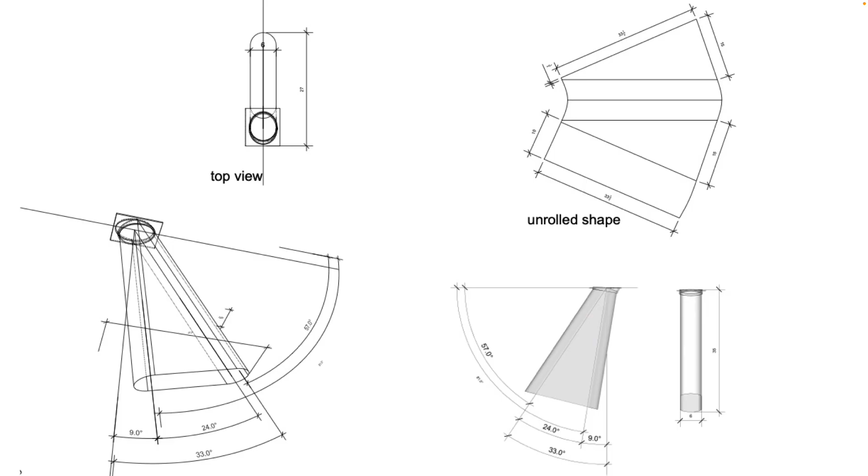This was really an aluminum kind of wrapped piece that I did use some Grasshopper for. There's a section through the roof assembly and that piece letting sunlight through at different times of the day. The more extreme angle is the equinox, and the more vertical angle is the summer solstice. There's Doug McCord. We're installing it in the roof assembly.

There's also this notion that creativity implies balance, so balancing technique with poetic understanding. Again, that narrative sensibility that we develop, almost the mind of a writer, right? And when we're drawing a building, we're also writing in space, you could say, right? So use all the tools at your disposal to experiment is something I like to say.

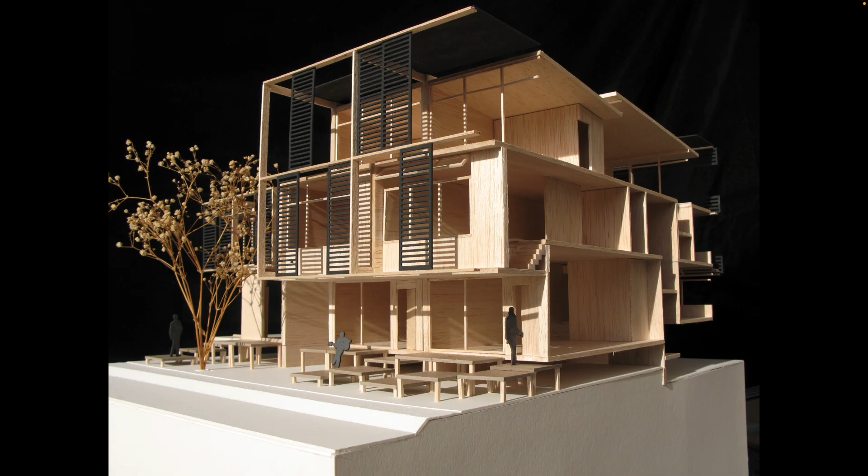This is a housing project I had the opportunity to design for New Orleans in my, I think, 4th year of undergraduate, after the Katrina hurricane in '05. Some work — models, representation, charcoal drawings, different things that interested me when I was in my undergraduate. Both to do with this kind of serialization of form, looking at things in a serial fashion in order to understand the kind of dynamism of it, but also just moments of shadow, moments of pause.

Models can be taken on the road. So this was actually my first job in architecture, for David Baker Architects in San Francisco.

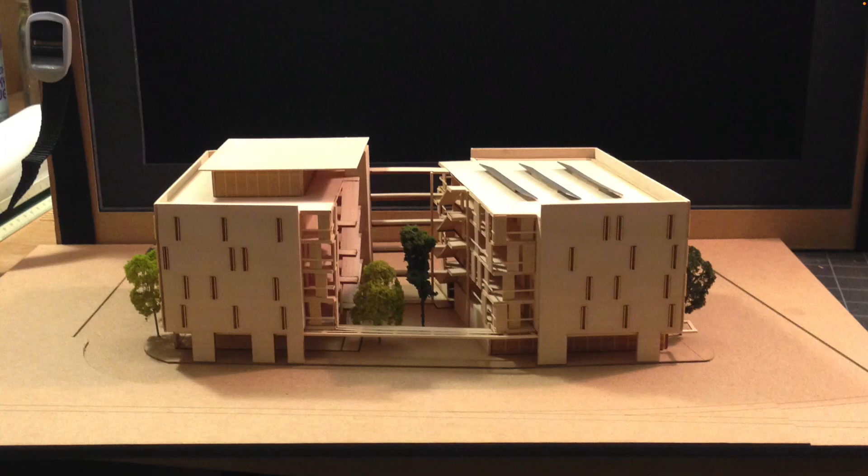After I graduated from UC Berkeley, I got a job as a model maker for an architect. They wanted to take this model to the client, and the project was in South Carolina. They had to carry this model on a plane, so it inverted and folded out of this little case. So again, a model is more than one thing.

Sometimes models are at an urban scale, assisting an architect in studying urban form in a certain location. Sometimes a model is just an exploration for its own sake. I call these bug models. They're like little studies.

Students have made tiny models during the pandemic so that they could carry them easily. The importance of forging friendships, I think, is critical.

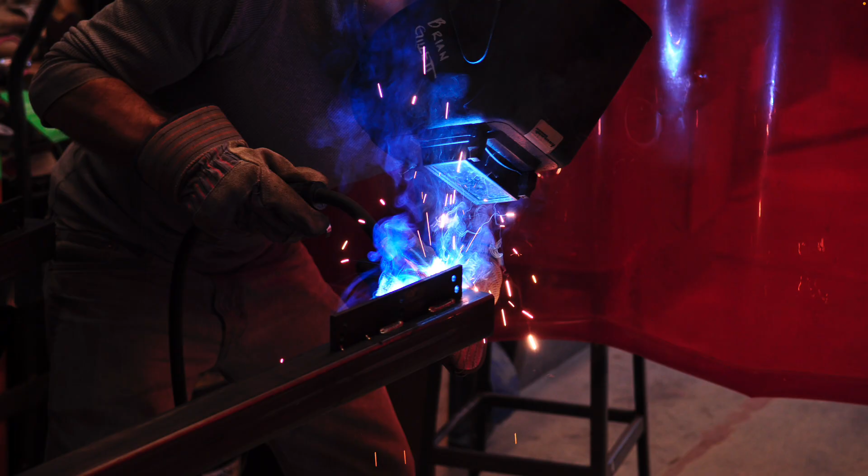So this is the plant lab. This was a project inspired by a group of students that built another project I can show, and we formed our own class. This notion in academia is that we have to go through the system, one class after another. As students, you have this kind of power, if you can find funding sometimes, to invent your own coursework at times. So we took this on ourselves.

This notion of a modular food system, we were interested in its representational capacity, which was a little surreal because it was at the San Francisco Flower and Garden Show in San Mateo, with a lot of homeowners looking at bird baths and landscape architects and things. This was like an alien object that landed in the show, so it was a very unique, interesting experience.

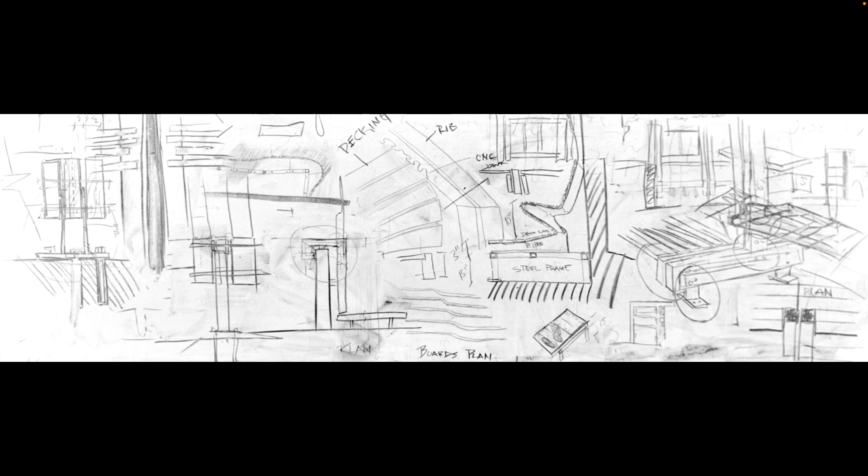Some more shots, I think these were all taken on film. This is the first project that preceded that, with the same team, a bench that we created, and the importance of drawing, talking about that narrative sensibility that we develop.

Developing that same sensibility by hand in drawing. This is an inverted image of a chalkboard we used over the course of an afternoon to figure out how we were going to approach fabricating a bench with a very small budget. This is the evolution of the bench form, which started as a kind of reclined form, and we decided to break it up into multiple pieces and explore this folding operation.

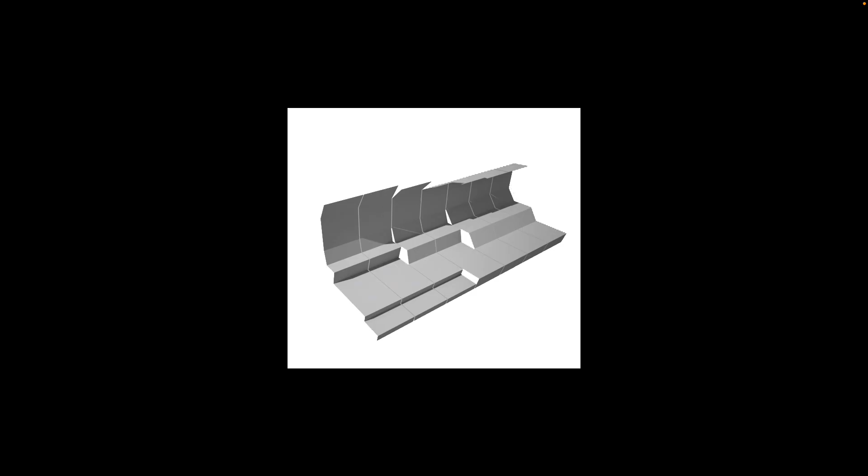To me, this type of design bridges an interest between material sensibility, fabrication, and architecture, in a way that it's an occupiable, large piece of furniture.

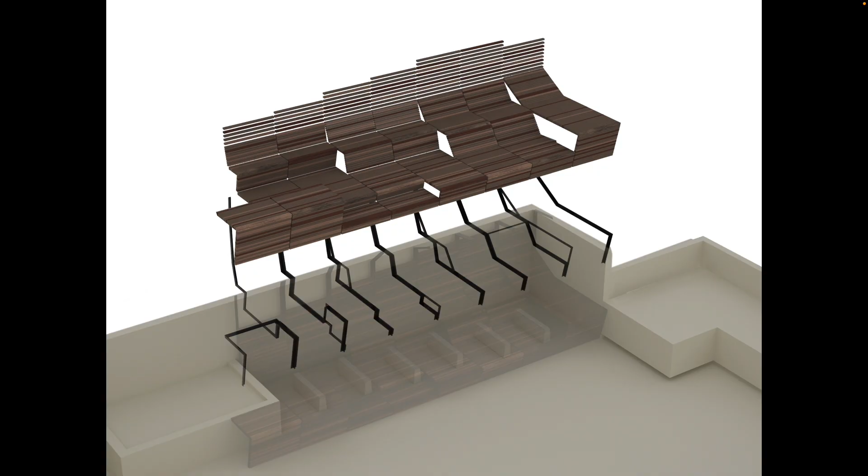There's the assembly: two back-to-back steel angles form the central structure, concrete foundation stem walls, and upcycled redwood that came from a local redwood supplier. These trees had been attacked by beetles and had to be cut down, so we upcycled the wood.

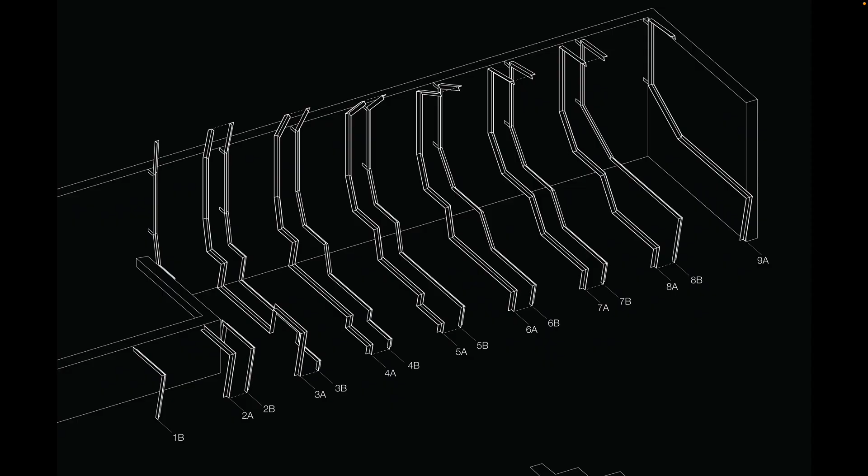Again, getting into the sensibility for shop drawings. If anybody knows about shop drawings, once you're building a building, specific elements like stairs or windows require another level of detail. They'll create what's called shop drawings, which generates the structure, which then generates the project.

It's a social space, kind of used for happy hours. It's still there on the UC Berkeley campus.

Another tenet is to work hard. This was the hardest work I'd ever done in my career, for a design-build architect here in the Valley. Once you're on a job site, if you ever have the opportunity to visit one, always take it. You'll learn so much, seeing details coming together, material systems, the reality of building. You'll learn a ton just from visiting a job site.

I was working as an assistant superintendent, figuring out how these curtain wall columns, the window wall itself, were going to meet each truss. The truss package, every single truss in the building was unique—there were 268 of them. I worked with the truss manufacturer to get their 3D model and bring it into the Revit model to coordinate all these details. Huge learning experience.

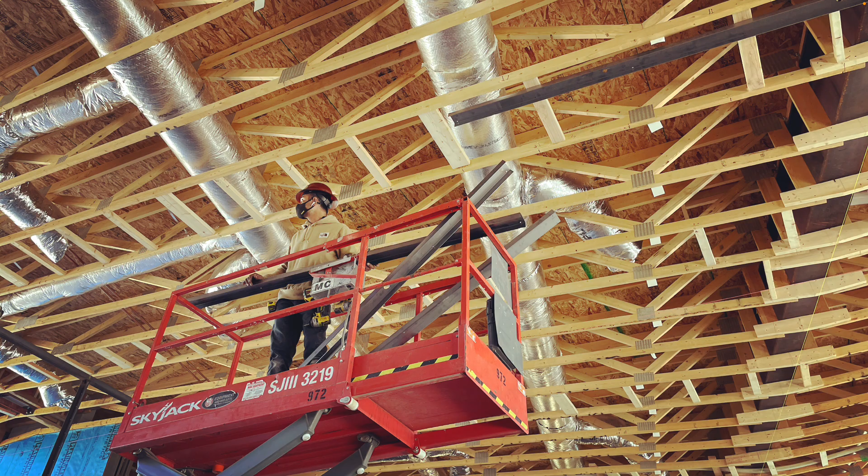We also created these channelized systems in the ceiling. This all gets covered in lath wood eventually, but the trusses are exposed, and you see this kind of channel. Within each channel is sprinkler openings, light openings, and air delivery, so all those details are carried by that channel.

Some of the work is not glamorous. I'm driving the water truck, having to keep the dirt wet, and thinking to myself, I have a master's degree, why am I watering dirt? But it's kind of a degree of humility. It's actually really interesting learning about how a construction site works as well.

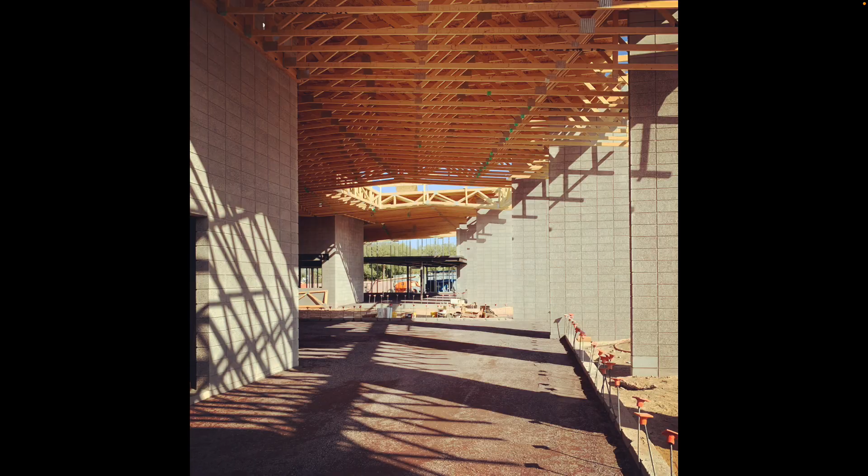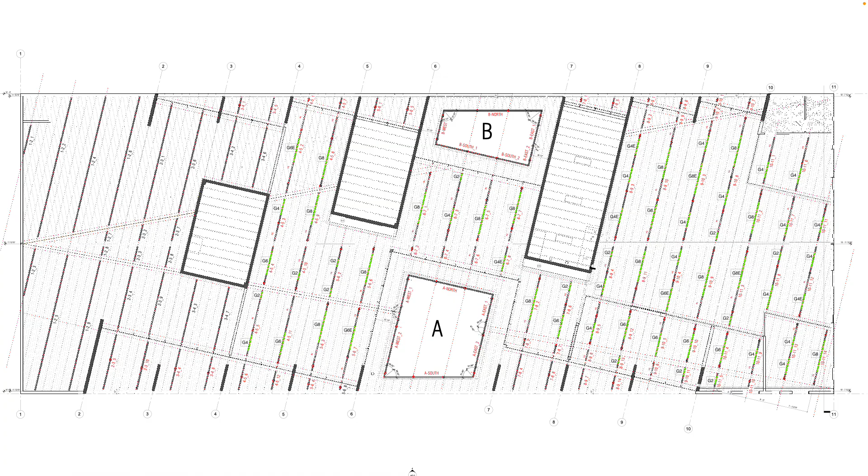Some shots of the interior. This is the reflected ceiling plan of that ceiling, and this is the shop drawing I used to locate everything, every feature in the ceiling. Developing this drawing took me about 3 weeks, during construction, where there's an urgency, we had to label every piece, every element, and then it had to be digitally fabricated.

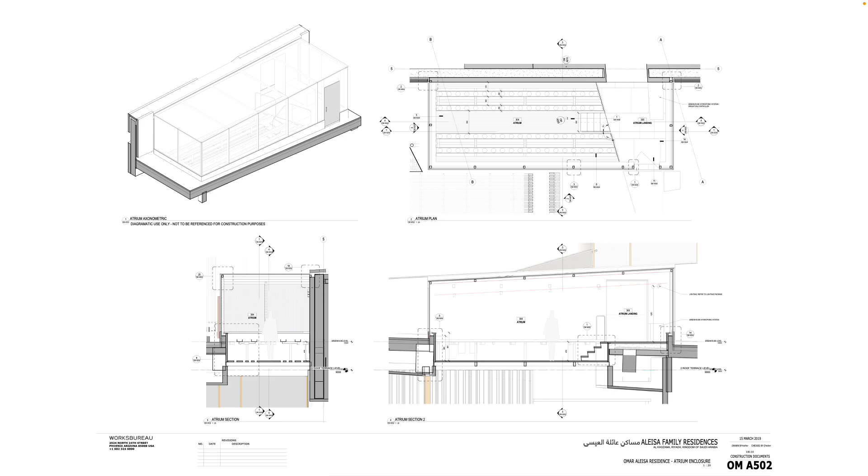Learning about architecture, about how details come together. This is for an atrium on top of a residence. Once you really start getting into detailing, into drawing using BIM or another program, you learn about what's called level of detail, how things are represented in reality for the contractor and subcontractors to understand how it comes together. This was the first project I ever drew in Revit that I was solely responsible for, being the BIM leader on the project.

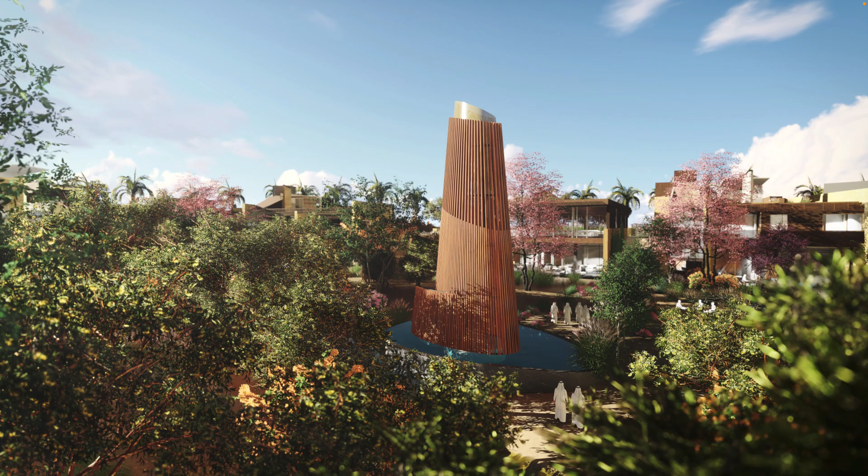This is the first project I ever drew in Grasshopper, which is a shade pavilion. Every element of it, from the structure to the wood slats to the skirt of metal at the top, was all done with parametric software.

Some speculative work. This was a project for UC Berkeley, my alma mater, where I went to grad school. This is a student life space study for the campus. They are expanding student life space, buildings that aren't academic, where students use things like the Memorial Union or any number of spaces that students use every day, that you maybe don't notice someone had to design. So how do you fit something into a campus?

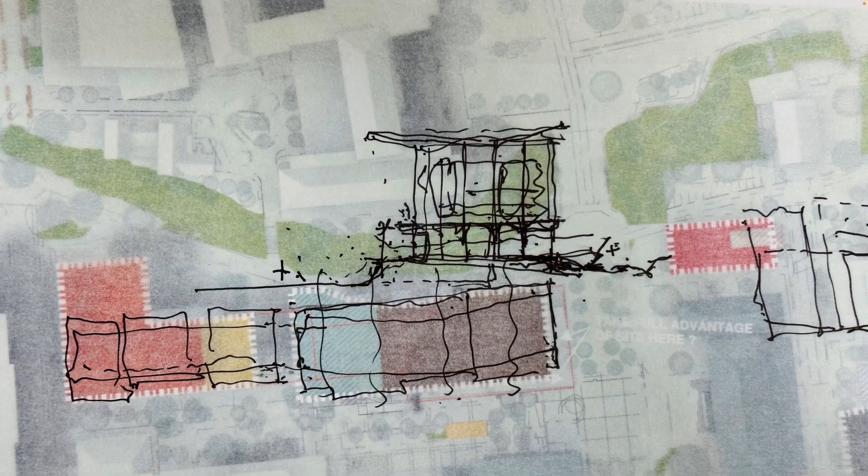Sketching early, figuring things out, from diagram to sketch. Lots of sketching, diagramming over 3D models. Mixing media between a physical process and a digital process can be really fruitful. This is the campus plan.

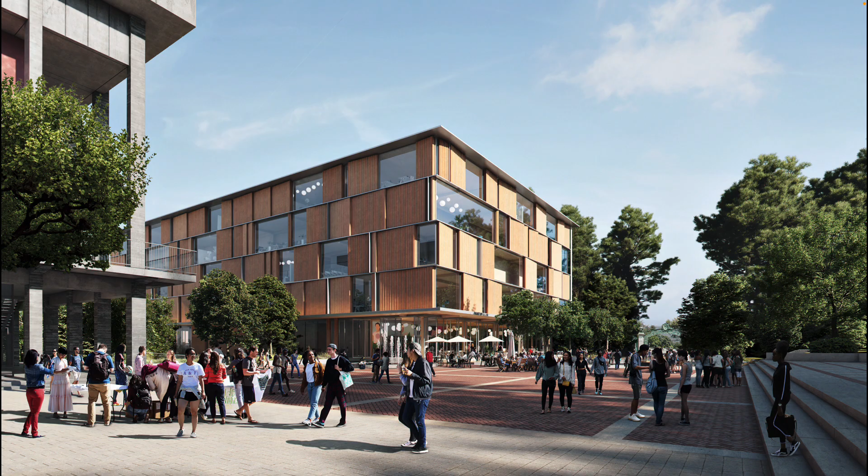The final renderings of the project, which was the student center. This is Sproul Plaza, where lots of student protests took place, like back in the 60s. It's a very important social space. And this is the entrance to the campus.

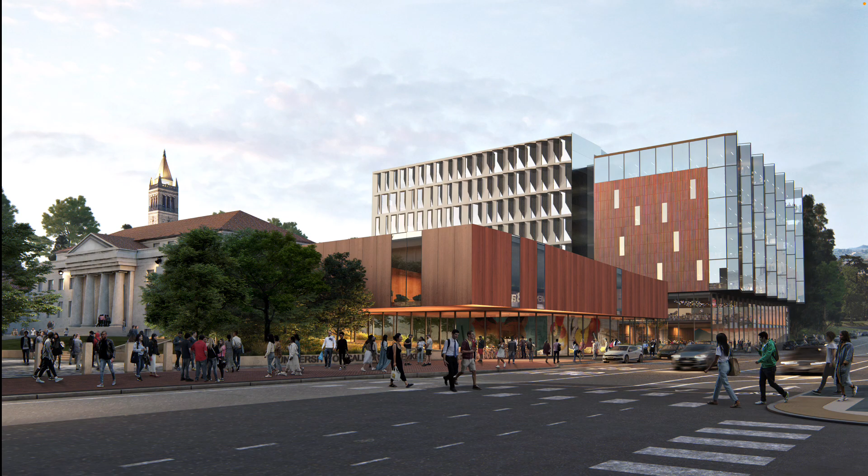I had another small opportunity to use some Grasshopper on shading elements and things like that. And working now I'm interested in this idea of optimization, which I understand your class is also looking at, kind of energy modeling and that kind of thing.

So Picasso said, to know what to draw, one must begin drawing.

So let's jump into a little bit of Grasshopper. Grasshopper is an interface that links with Rhino. Everyone used Rhino before? Probably the majority of you. You can, for lack of a better term, think of every command that happens in Rhino, for example drawing a cube or a line or a point, as having an interface in here that can reference that geometry.

So I'm going to make what's called a brep, which is just a 3D volume of space in Grasshopper. I would just double click into the Grasshopper space, say, hey, I want to reference an object, right click, set one brep. Now Grasshopper knows that that object is that volume. Information flows in Grasshopper from left to right, unless you have a very disorganized script, you want information to flow left to right. The idea being that you can do any number of operations you can imagine on this geometry.

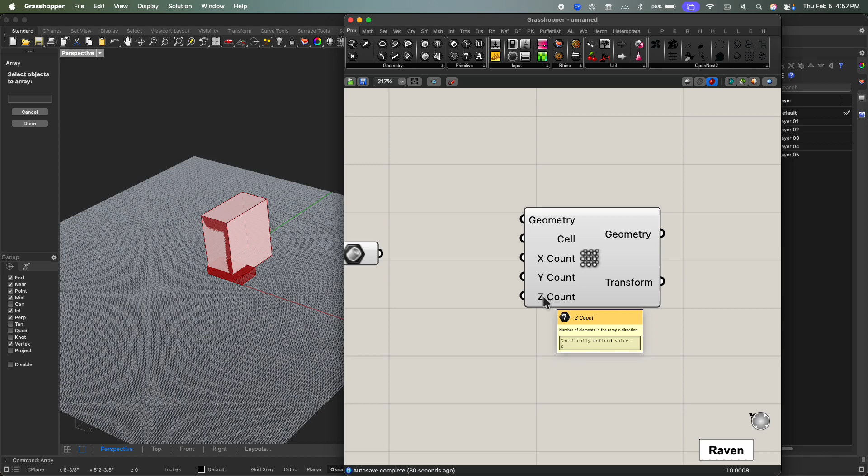So let's just say we want to array the geometry in a volumetric fashion. It's asking me for a number of inputs, just like a command in Rhino. If I wanted to say array in Rhino, what's it going to ask me? Select the objects to array, tell me what object, right? It's doing all those same things, but in a graphical node-based interface. It's asking for the geometry, it's asking for the cell, or the spacing by which that geometry will be multiplied, asking for X, Y, and Z. How many of those objects will there be?

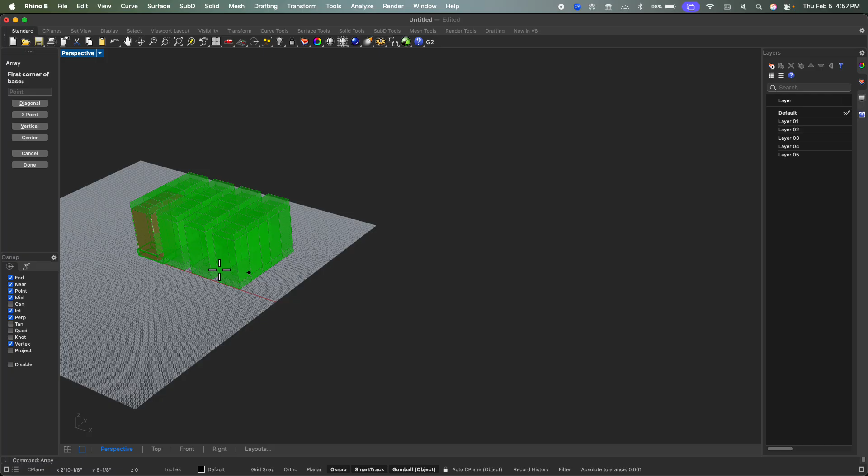So I can give it these inputs. I can tell it, well, this is the geometry, and I'm going to connect that node like that. It's going to immediately have some default values in here, so you'll start to see something happening that isn't maybe what we intended. But we can say, all right, that cell is going to be set to one box. I'm just going to define a loose form like this, and then I'll double click and enter a couple values. If I type in the number 13, it's going to create a number slider. I'm going to copy that a couple times and provide that information to this node. So X, Y, and Z, that becomes the number of elements in the array.

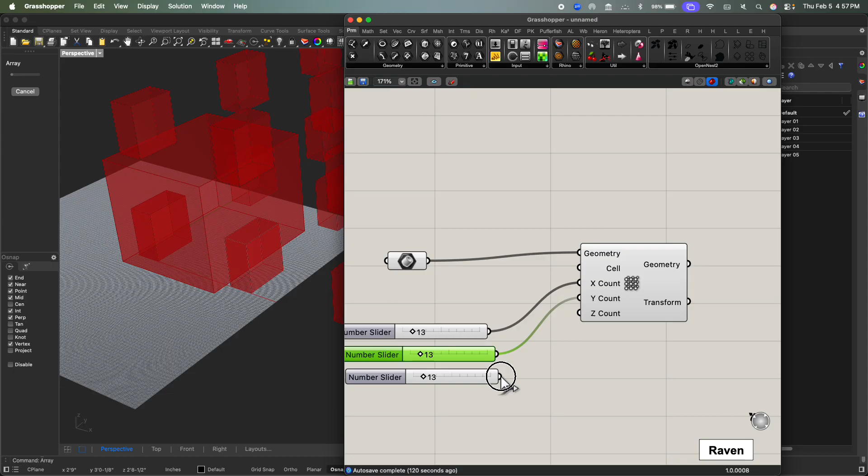So there's a whole array of objects, right? Now this is how Grasshopper thinks, using digital information, inputs and outputs, essentially. And that's all you're really seeing in a Grasshopper script. When you open a Grasshopper script, or when you get lost in one, it can look very complicated. You can have memory problems about what you were doing, what mode you were in when trying to solve this, what your state of mind was. But getting into this space allows you to automate some things that might be repetitive otherwise, and gives you an advantage in that way.

Now, to go a little bit further than this, let's just say we want to reduce the number of these. The cell, yes, is essentially—if I hover over any of these, it'll tell me the cell is a 3D box array. So the cell is another volume of space that's defined as two opposing 3D points.

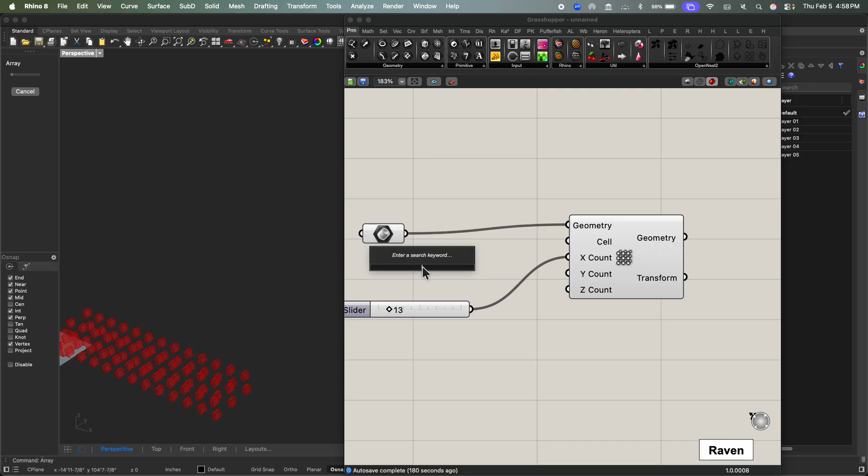So you didn't need to indicate that to make that array? I could use geometry here, I could type in geometry, I could set a physical object in Rhino as that input. But what I did instead—I'm sorry if I didn't explain that—I right-clicked on that input and said I'm just going to set one spacing, or set one box. So if I change that now to a much larger area, for example, those are going to space way out because that's just the input for spacing.

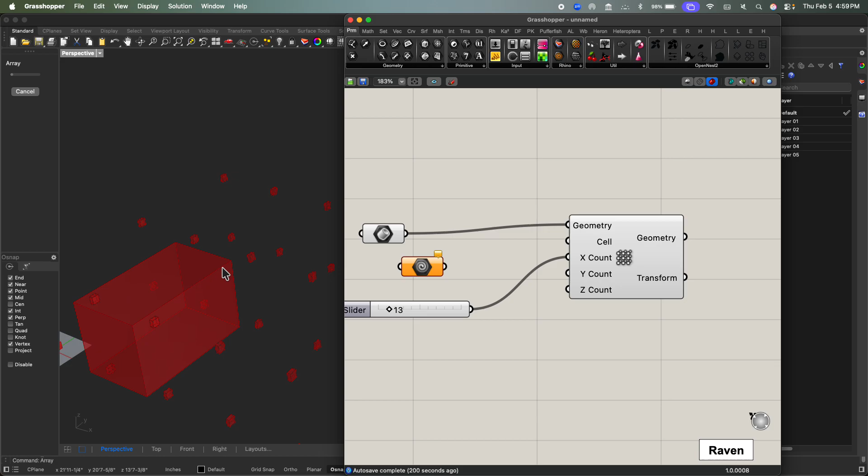Got it. So one thing that's a new tool that's come along—and I know people have opinions about AI and energy use concerns, and those are all very real things—but AI is also useful for helping us problem solve. So I'm going to show you a tool called Raven. There's a student version of Raven that's, I think, $5 or $10 a month. It's $50 for the pro version otherwise, so it's a pretty good deal if you're a student. And once you install Raven, it appears as a button down here on the lower right.

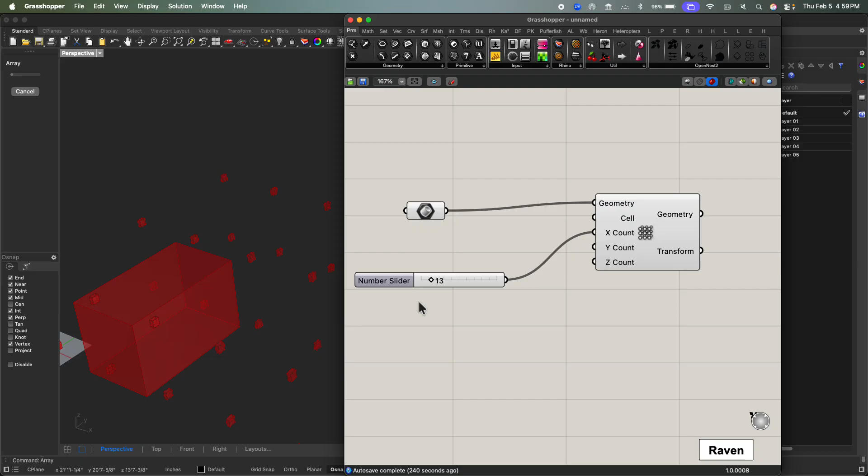Let's imagine—I'm going to actually reset this cell to a smaller spacing so we can see what we're doing. And let's imagine, for some odd reason, we want to rotate these cubes in some fashion. Now, I don't have enough Grasshopper knowledge to do that, I don't know how to do that. I'm going to use Raven to help me do it. So Raven's a wonderful way to learn some Grasshopper. Raven opens as this dialog window that actually stays on top of your desktop no matter what you're doing. So if I open Rhino or Grasshopper, this stays on top—they're still working on this tool.

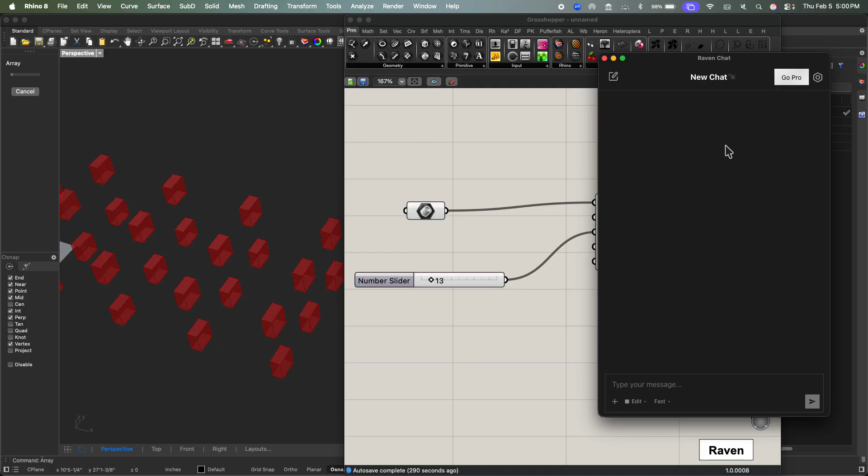It's in its first version. But within Raven, I can use language, back to the narrative sensibility, right? I can use actual language to tell Grasshopper to write me something, which is pretty impressive. It doesn't mean you don't learn Grasshopper—it's not a workaround to some deliverable. It's really part of a window into a process by which you can learn more of this kind of workflow. So let's say I want to randomly rotate these cubes. I can prompt Raven just very basically using the brep input: rotate the cubes about their center randomly.

Now, when I write a sentence like this, it's essentially a mini Grasshopper script, if you really think about it. I'm saying do this over here and then that.

So now I'm going to hit enter. I'm going to put it in smart mode—there's fast mode and smart mode. There's also ask mode, where you can ask it questions about a script. It won't edit it, it'll just tell you what's happening in the script, which is pretty interesting. So I'm going to hit enter and just see what it does.

We'll zoom out a little bit here. It's going to think for about a minute—usually it's under a minute, depending on which settings you have. It starts thinking about component search, looking for a list of components related to my prompt, and starts to put those in the space of Grasshopper, connecting them based on its knowledge of how they should connect. It's a recursive process, which is related to design. We don't design something in one pass—we design things iteratively. This is an iterative process.

So we're going to see what it thinks. Still thinking. Are there any questions while this thinks? What's the difference between fast and smart mode?

Just speed, really. I think smart mode will look more specifically at your language structure in some ways, while fast is more about a quick result. If you're using fast mode to do something very simple, like arraying a grid, or even what we're doing right now, which is relatively straightforward, you could probably use fast mode. And you clicked smart, though. I did click smart, because I'd rather it get it right. And the idea of speed in the design process is its own topic.

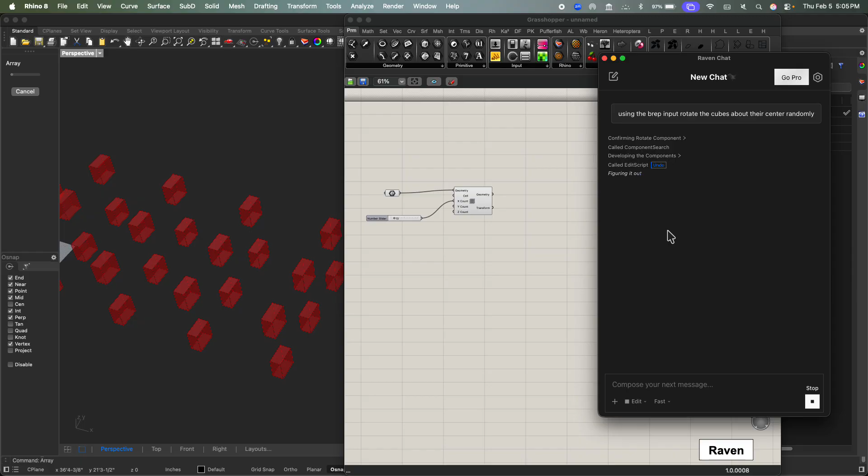So when you're optimizing something, you're really thinking about: what's the weather data, how do I bring that in, what are the constraints, what do I want to change in terms of a depth or a width or a certain number of parameters. If you have too many parameters, you're either going to break that solver and it's not going to work, or you're going to return a lot of errors. So the more you can edit down that optimization process to know exactly what you're solving for, the better off you are.

I have a quick question. Yeah. Do you guys know what optimize means? Do you have a guess? Yeah, what is optimization? Anybody? Efficiency, like taking less steps to do something. Yeah, that's one way to think about it. What might be another working definition?

So efficiency is involved for sure. I would say it also implies an iterative process—recursive processes, or trying things over and over again to find the best result. But fundamentally you're right, it is about efficiency. It's about finding what's going to give you the result that maybe returns a lower energy use, for example, or returns a lighter structure. But that reiterative part is important too, because optimizing is not one thing—it's a process to optimize. So it's not just efficiency, it's the optimization process, which is reiterative, as you mentioned.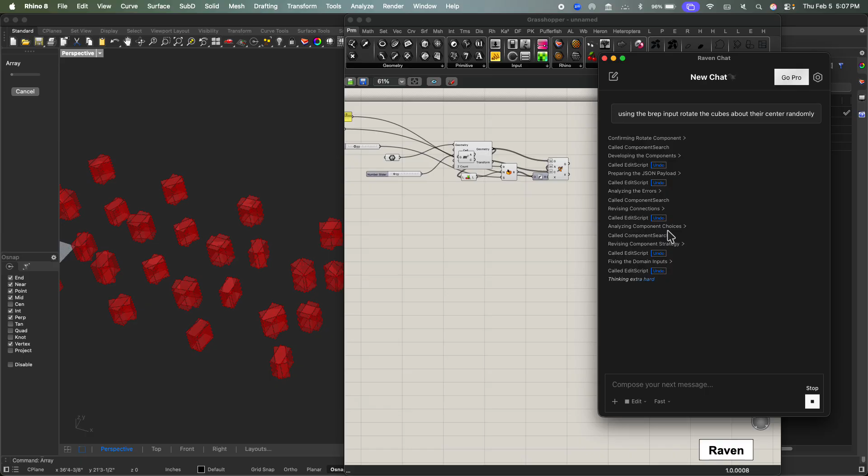Yes, and there are terms within Grasshopper that are specific to Grasshopper in some ways, but there are also broad terms that just mean what they mean, right? A point in space is always going to be a point in space no matter what program you're working in or what reality we're talking about. A point is a point. So the mathematical constructs of those things aren't changing, but the way we can describe them can change.

So now it's kind of finished. I've added a random rotation to your cubes. I used area to find the center of each cube, generated random angles between 0 and 360 degrees using random and list length, and Rotate 3D. You can adjust the seed slider to change the random pattern.

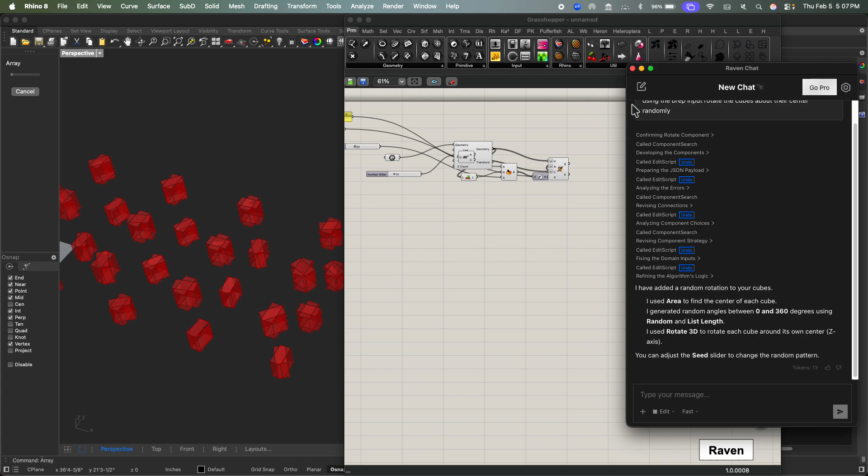So what Raven has written here might be a little messy, but it is cohesive, and none of these components have turned red or orange, which would indicate that they're not working—so that's a good sign. And you can see over here that we have some rotated cubes that look like they're overlapping.

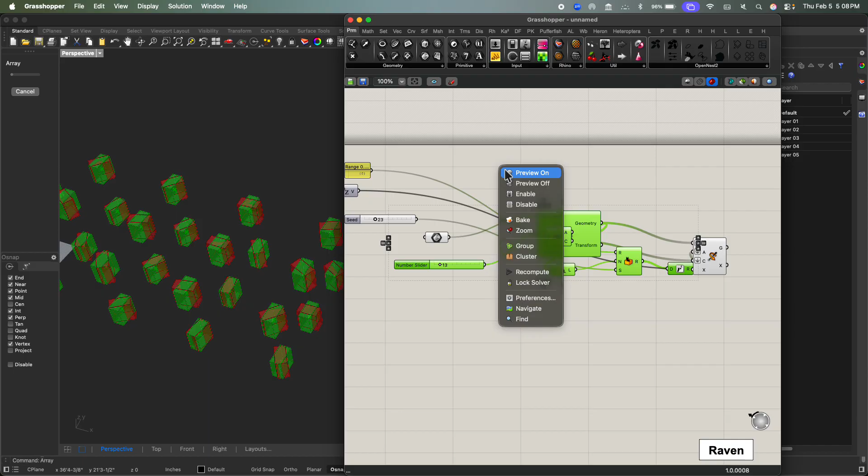Now, if I minimize Raven for a moment, these nodes are all visible because their visibility is turned on. I'm going to right-click on the canvas and say Preview Off, and then we'll only see our rotated result, which is this last node here. So if I highlight that node, that geometry lives within that node.

I can now right-click it and do what's called bake, which means it's going to cook the geometry into the 3D model.

Oh, got a bake failure. Never seen that one before. Let's try it again. It's only when you present—maybe it's only when I'm presenting it won't work.

But in 95% of cases, this will bake your geometry into the 3D model that you can then render or use otherwise, do Boolean operations, do anything you want in Rhino that you would do otherwise. Once that geometry is baked into Rhino...

Rhino—there's no pulling it back into here unless you want to re-reference it, so it's no longer live. If it's green, highlighted like this, and you can change the colors, it's no longer this live geometry, it's now kind of cooked. So it's no longer the cookie dough, you have the cookie.

So that's kind of the basics of really what I wanted to show, and I'll answer any questions that anybody has, but we can experiment more.

If you guys have a prompt or something that interests you, we could ask Raven what it thinks and try something else. What do you guys think?

I have a question. When you bake, does it auto set to a specific layer, or can you adjust what layer it bakes into? Good question. When it bakes, a dialog comes up and you specify which layer you're putting it onto.

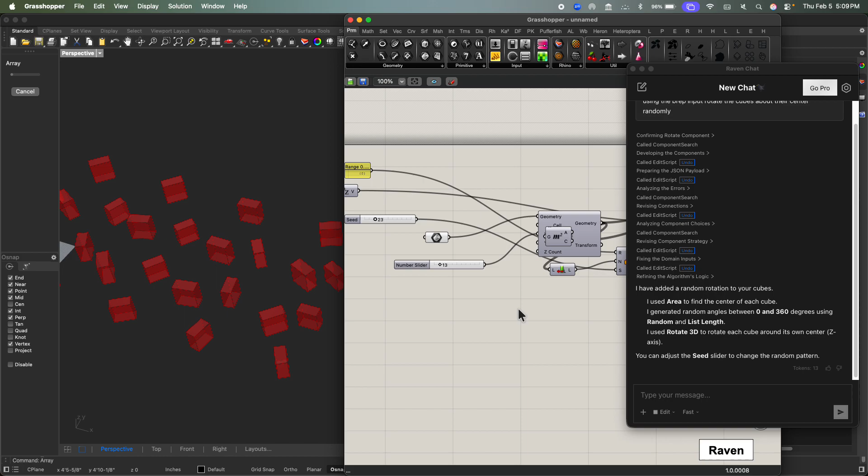And then the bolded parts in Raven, are those indicating the node that is like the name of that node? Yes, and I should go into a little bit of Grasshopper basics for that.

So you can change the visibility of these objects by going up to display. You can say, don't draw the fancy names, which will change how the icons appear. You can say, I don't want to draw the full names of things, so now it'll just give me abbreviations for the inputs and outputs, for example. But I like the full names because I like to read things, so we're going to see the full names.

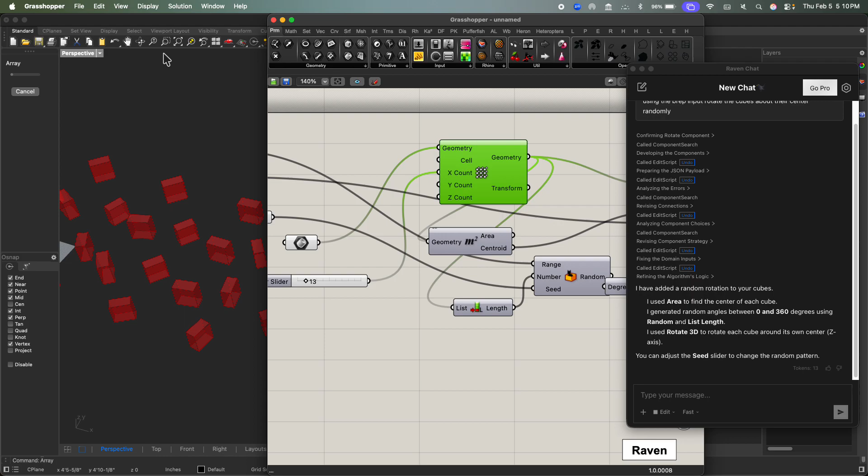Let's see, draw nickname overlays. That one maybe isn't functioning right now. I need to update this version of Rhino.

But essentially, the interface of this is somewhat mutable. But in general, the information is always moving from left to right. It's always a node-based interaction. So you're telling this information what's kind of going on.

And to go into a little bit more Grasshopper basics, if I type panel, this panel is just like a little sticky note. I can take any one of these nodes and plug it into the panel, and it'll tell me what's the output from that node. So here's a component called list length, which I can find from my set of tabs up here, or I can just double click and type in list length.

And let's see what's in there. A value of 78. We have 78 cubes, right? Now if I tell this other node that I want to see what's in there, let's look at the random node. A whole list of random values, random angles that it's rotating the cubes at.

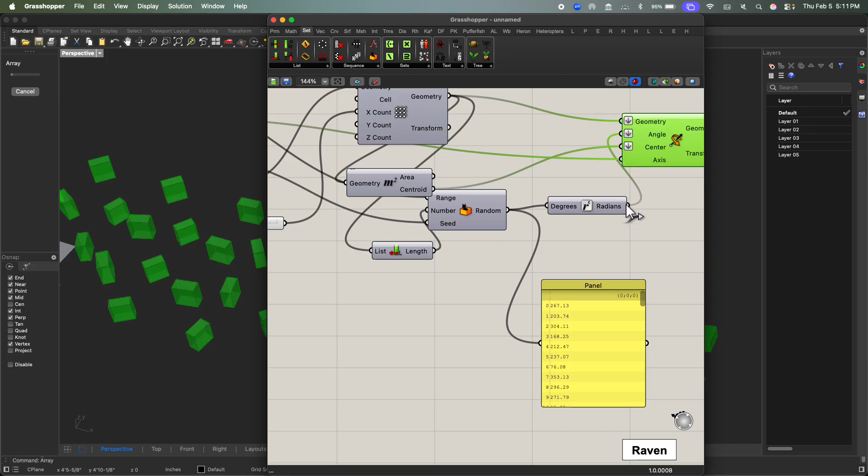If I look at translating those rotations from degrees to radians, which it needs for this rotation tool, you're going to see similar random values that are different in radians, which are different than degrees. I'm not going to get into the math of that specifically right now. But then you kind of end up with your node.

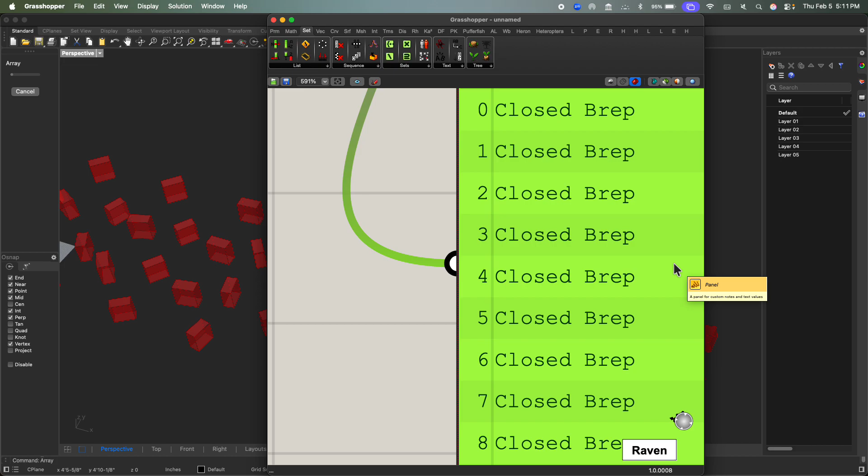And then if I plug this panel, for example, into what the result is, you'll see that those are all closed BREP shapes. BREP just means solid. So that's some of the basics.

I hadn't prepared a ton. I thought maybe you guys would have some ideas of something you'd like to see us try in Raven. We could try it out. I have another question.

So in that final node, the little arrow pointing down next to some of the words - oh yes, those. So when I'm looking at data, the data has a structure, what's called a structure. Let's just go full screen in Grasshopper here.

So let's plug our geometry into our panel. You'll see a list. The lists always start at 0, which is important to remember because sometimes you need to remove that 0 value in order to have a clean list of 1 through 10 or something like that. That can get a little bit tricky to manage sometimes, but it's not that hard.

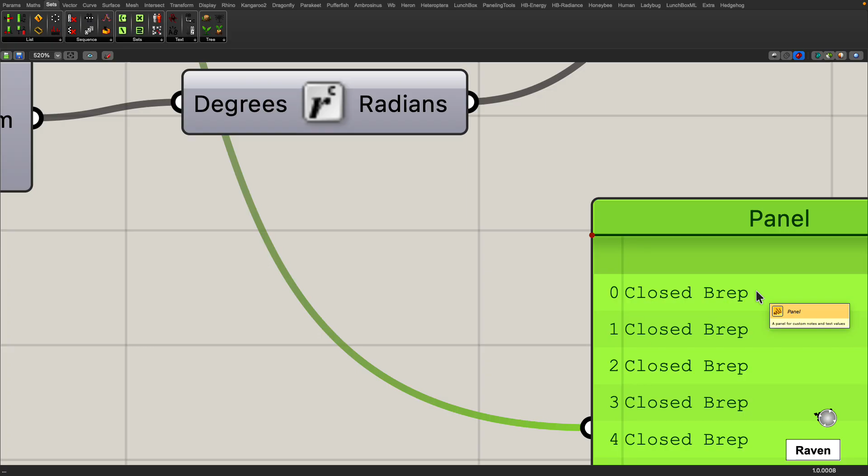Basically that structure of that data, there's also one called - there's so many components, I forget the names. There's another one that will show you, I think it's data tree, or maybe it's just tree, or is it param? There is a tool that I'm blanking on the name of. This is why it takes a lot of back and forth. That will show you that data structure itself. I'm just looking at a list of that data in the panel right now.

If I use this down arrow, Raven did that by using what's called flatten. Here you can see that check mark. The data's been flattened into one list when it's coming into the node.

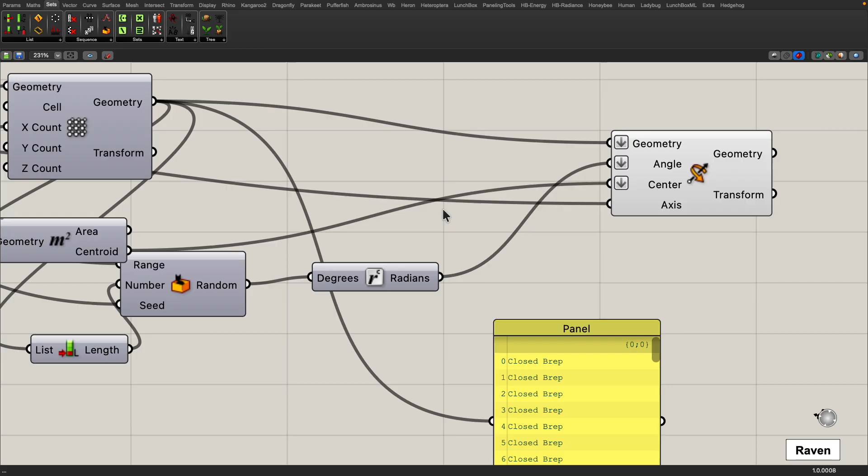Okay, which means it loses all of this structure of being in a list. It might have just done that as a precaution in case there's other data in there. Sometimes you got to reverse engineer Raven's logic to understand it. But that flatten command will take the data as a list, and if there's sub-lists in there, it flattens it all into one list. There's the opposite of flatten called graft, which will take a list and give it structure.

This is Raven though, using Grasshopper. Raven is a plugin in Grasshopper. Yeah, but it's basically doing it as if you're doing it manually. It would look like this, right? Any output from Raven will be a Grasshopper script. And what I'm saying is you can do what you're doing here without Raven.

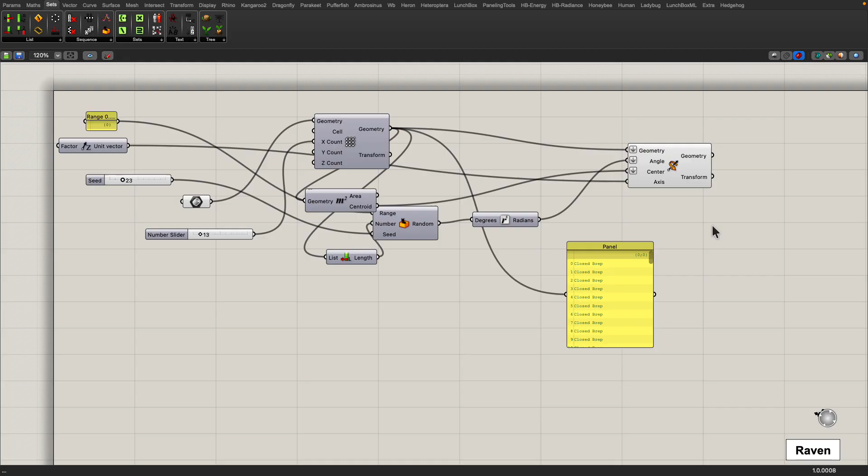Yes, I could use Raven to do this, I could say, show me the data structure. Let's actually try that. And maybe we go into ask mode. Ask: tell me about the data structure of this script. I'm going to learn something about the script that I just wrote, right? Interesting, it's going to think. I have it on fast mode, so it should think relatively quickly. It depends, this script isn't that complex maybe, so it might get it right. We'll see.

And there you are. So I can now read through. The current script creates an array of boxes, and it tells me exactly what it's doing. There's a slight mismatch in the data trees it's telling me I could look at, handled by component modifiers.

What was your prompt for this? What did you say? The original prompt was to rotate randomly the series of cubes. Tell me, I see it there. Tell me about the data structure.

Yeah, that's great. Now I'm actually in contact with the developers of Raven, as of mid-fall I think it was when I got in touch with them. And they're actually working on some pretty interesting evolutions of this tool where it'll eventually have a memory, so you'll be able to go back to your previous prompts, kind of like an OpenAI tool or one of those, to revisit your previous prompts.

If I close Raven, I'll lose that prompt. So sometimes I'll just take screenshots and document what I'm thinking, what I'm doing, so I can recreate it if I want to. But they're expanding this tool very actively. They want metadata of users, so if you're contributing to Raven, it's kind of a cool way to participate in that.

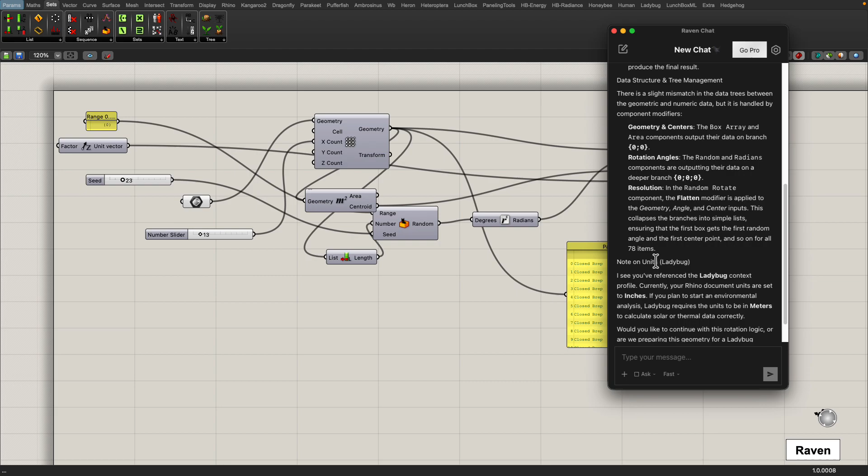Now I can go through here, it'll tell me all about it. I can keep asking it questions. Let me actually open a script that I have from way back when, if I can find it. Let's see.

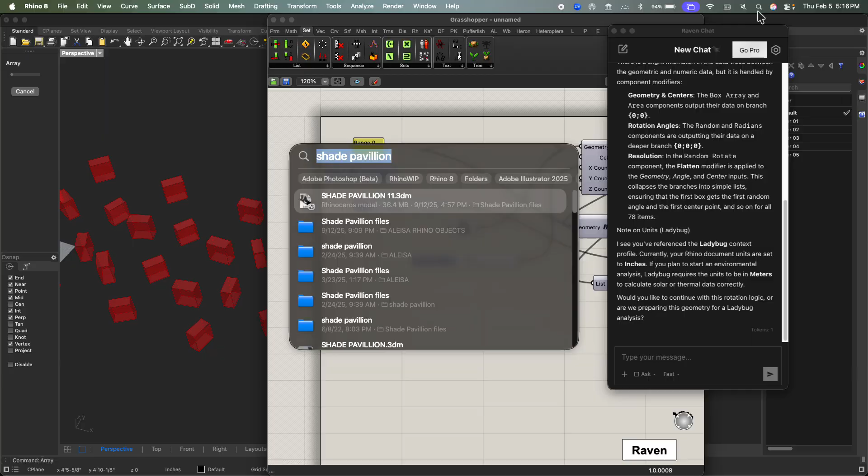Oh, internet doesn't want to. Here. I went through, this is how many iterations I went through to draw that conical structure that you saw earlier. So let's just open one, maybe version 6 or something like that.

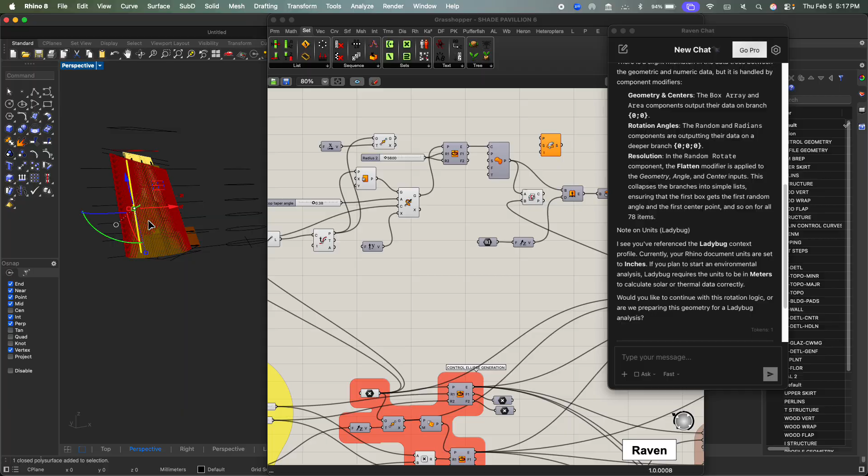This is an example of a script that I was using to generate geometry. There's the model with some cooked or baked geometry that I was experimenting with, and then somewhere in here is the live version. This version of the script might be broken, it might not work, but you can actually group and cluster nodes.

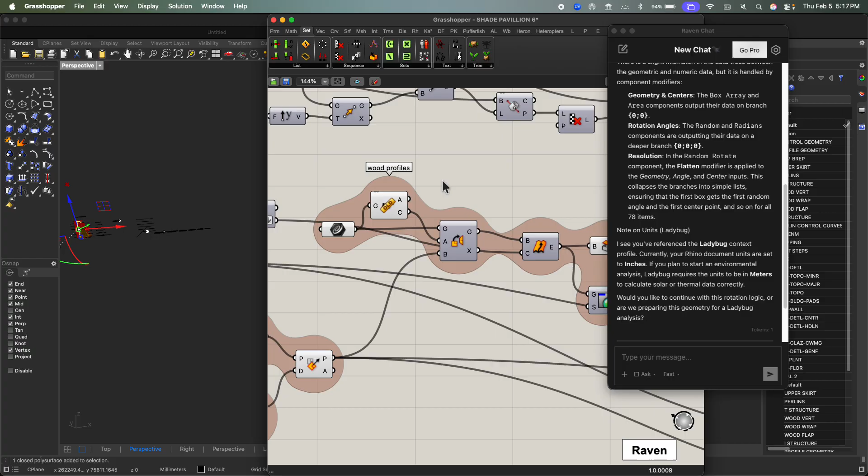So I can move this group around as a group. I can identify that group as the wood profiles, for example, and know what that part of the script does, right? Raven is working on being able to interpret those groups as well. So that's actually pretty useful. You can say, hey, take all the wood profile part of the script and make it do this, right?

So that's pretty interesting. This is the whole script altogether, it's kind of a beast. I was learning Grasshopper at this point, so it's not the cleanest script, but it worked.

I can ask it, let's close Raven and reopen a new session. I can ask Raven, in ask mode, can you describe what this script is doing? Like one of the most broad questions you could ask, right? But let's see what it does. Can you describe what the script is doing?

So I didn't see the hands go up earlier, but who uses Grasshopper now or have used it? Anybody? Okay good, quite a few? So this is super helpful. Good, you can ask a question.

How much of Raven did you use during this process of making the shading structure? This was way before Raven was ever invented. I made this back in 2017, when I was first learning Grasshopper. It got a lot more complicated, and the final result was even twice that size, I think. But here we have some results of what it thinks about it.

The script appears to be a parametric generator of a pavilion structure. I must have put some labels in there that it read, using elliptical profiles and vertical structural members. Here's a breakdown of the logic, and it tells me each kind of group that it knows it can read and what that group is doing.

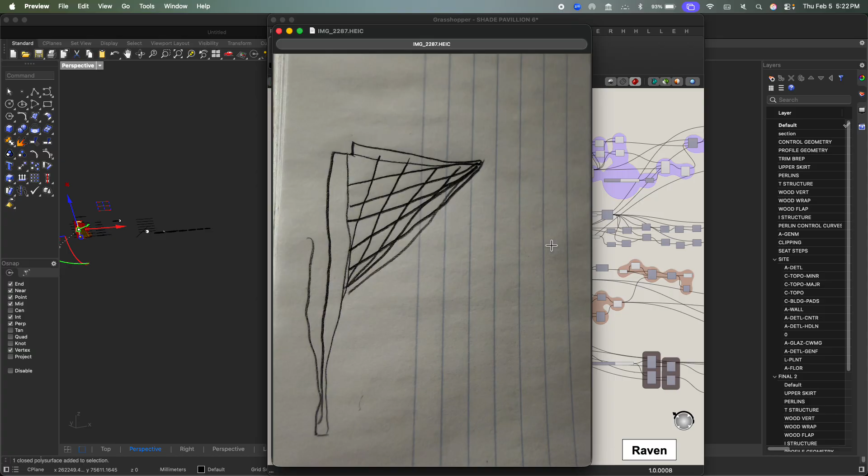So here we go. Okay, what's your name again? Alex? Alex, here's Alex's sketch. Let's rotate it - do you want to rotate it a certain way? Did you have an idea? The long line is the top, the long line is like this. Yeah, okay, let's save it.

Let's use it as an input for Raven. I'm going to start a new Grasshopper document, and we'll tell the sketch to pop in there. Oh wait, that's a path, sorry, I got to use the plus button. Is that our sketch? No, that's a rainbow. There it is.

And what should we prompt it to do? Maybe come up with a prompt. So that was like an idea for a shade structure - the top is just like a long overhead shade, and the side was just like a wall. It was supposed to kind of fold in steps, like a book opening. But each end has to extend to the next - so like this one, if I extend it, then this line is not short enough, so it would have to extend out. Yeah, so this is where the narrative sensibility becomes useful, right?

We should develop our skills as writers, because really what we mean is, hey, I want to describe this. Oh wait, how do I describe it? Skills of a writer, right? So if you can say, well, it's a shade structure, no it's a trellis, no it's whatever the term is. If we can package that prompt efficiently and put it into Raven, let's see what it generates. Let's just say, develop from this sketch a shade structure using polylines. Pretty open, pretty broad.

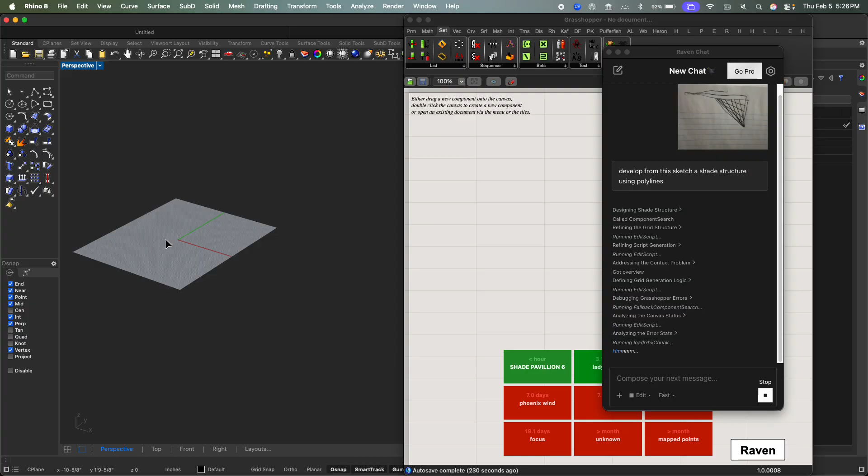But in that process, they were iterating through the design, giving me hand drawings of what they wanted. I was working that information into the drawings and into the Grasshopper script. But now we have Raven, so we can use natural language, and it's amazing.

And so here it's still thinking. But there's limited use cases at times, not everything needs to be done in Grasshopper. But if you have a condition related to optimization, or a more sculptural form, or a very detailed facade for example, a lot of facade designers or specialists will use it. There's also a lot of use cases in jewelry or sculpture, or anything that needs complex form making.

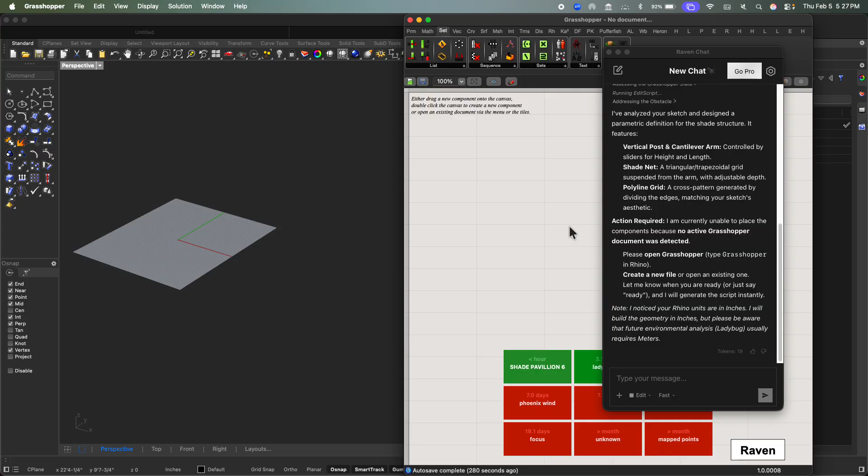So let's see. Action required: I'm unable to place the components because no active Grasshopper document was detected. Now that's strange. Let's copy my prompt and reopen.

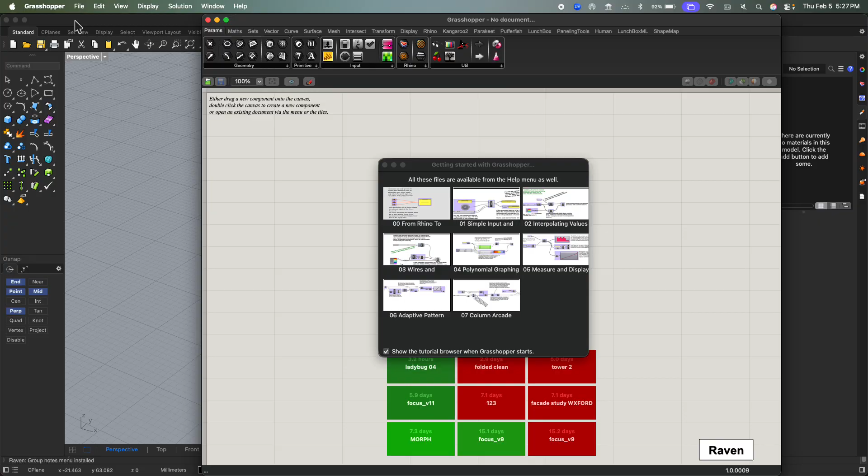Actually, I'm going to use the work in progress version of Rhino that I have, this is Rhino 9. Let's see if it'll work, it's a work in progress version so you never know if it's going to crash, but let's just try it out. We'll go to new model, Grasshopper. We'll open up Raven, I'm still on 7, and we'll point back to our sketch.

And we'll put in our prompt: develop from this sketch a shade structure using polylines. Let's try fast again and see what it does.

It depends, it's better sometimes with more simplistic line drawings. For example, if you wanted to make a very sculptural building and gave it that sculptural sketch, it's not really going to know what you mean in terms of the inputs, because it's trying to guess—oh, there's a curve over here and a blob over here—and it's going to make something really crazy.

But if you can define what I call control geometry—for example, in that elliptical tower, there's an ellipse as the control geometry, and everything is based on that ellipse—really what you want to do is set that control geometry and then work from there towards the form you want to have happen. It's a little bit like sculpting with math.

So have this geometry in Rhino or Grasshopper first, and then? Just an idea—it could come from a 3D model, it could come from a sketch. It'll read a sketch. If you wrote a long enough prompt using the correct wording, you could theoretically do it entirely with language.

So I have an ellipse on the XY plane. Copy that ellipse vertically by 100 feet, rotate it, do this—you know, you could use Raven to do that.

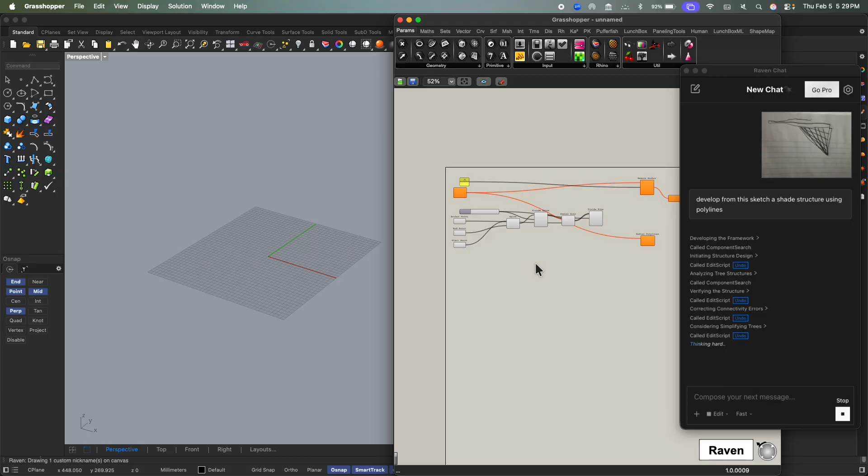So here it's generating something, let's see what it's doing. You can set this up any way you like—I like to keep Raven off to the right and see what it comes up with in Rhino space. Here it's iteratively thinking through, adding components, thinking about how to best make this sketch.

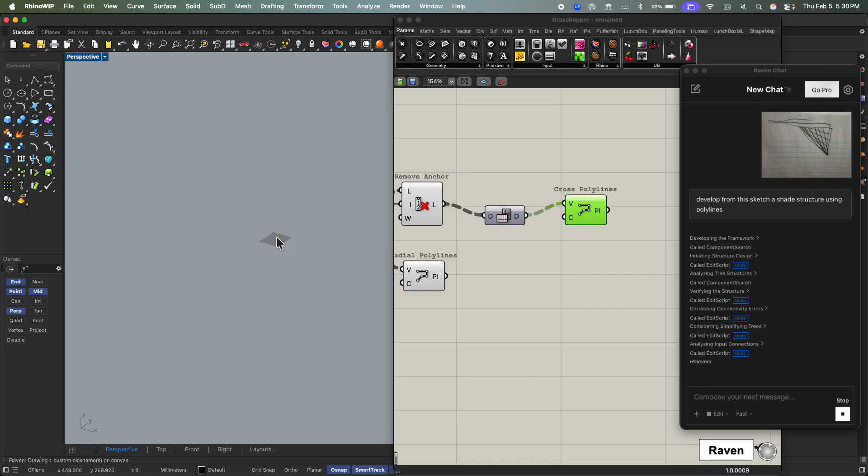Aha. Whoa. There it is, wow.

Interesting, okay. So this is where some kind of orientation would help—in your sketch, if you say draw a line at the bottom and say this is the ground, this is the XY plane, we're looking at it sideways. Now the next thing would be, this is my form above the XY plane. It always wants a point of reference, similar to how an AI kind of thinks.

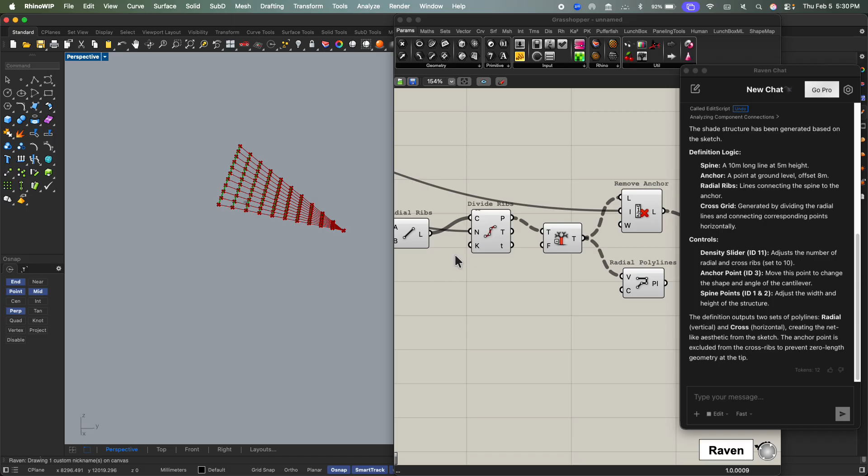So there's a starting point, right? What did it do—it made a list length, it kind of broke up this tree structure. We can play with the density of that form in here, the density of the points, dynamically.

That's pretty cool. Let's try a facade. Who wants to try a facade? Is your sketch ready? Do you have your sketch by any chance? Okay, bring it up.

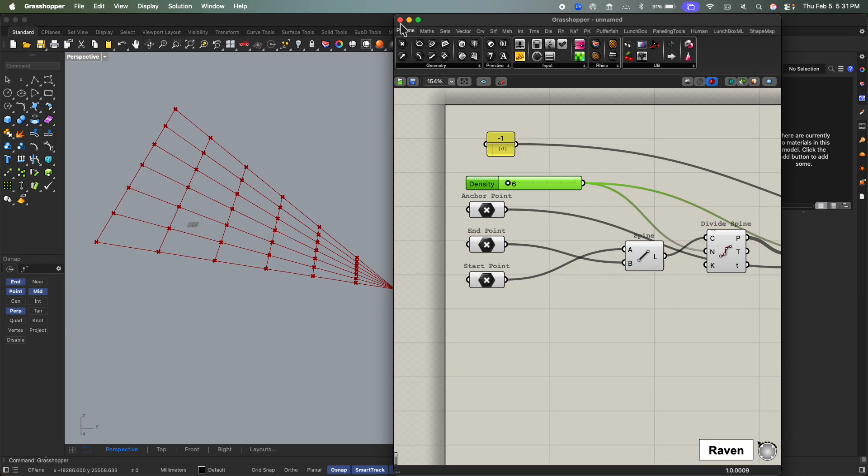Might want to add a ground to it. I did. Let's go to a new Grasshopper document. Okay, I'm thinking the top—like a tall facade with a cool building. Can I use both of them? I'll just get them in one picture. Go ahead, there you go, let's try it, okay let's see.

Thank you. Let's not change the save, let's save that. Let's send this off to the computer. Save to files, save.

We'll open up Raven, put it on smart mode, edit mode. Let's add our image, which is 288 there—should be the right one, right? Yep, there's our sketch.

So we're going to try and turn this into a kind of facade. What's nice is we have almost a sectional drawing, it looks like, and a more elevational drawing—was that the intention? Yeah, is this one kind of a section? The second one I want to scratch, but the top one I was thinking like this glass storefront with a band around it.

Okay, so that's good, we can use language, right? We can tell Raven, make a band around this facade. Let's see what it does.

What's really cool is that had you not done it, you're ahead of the game now a little bit—I mean, not necessarily to all of you.

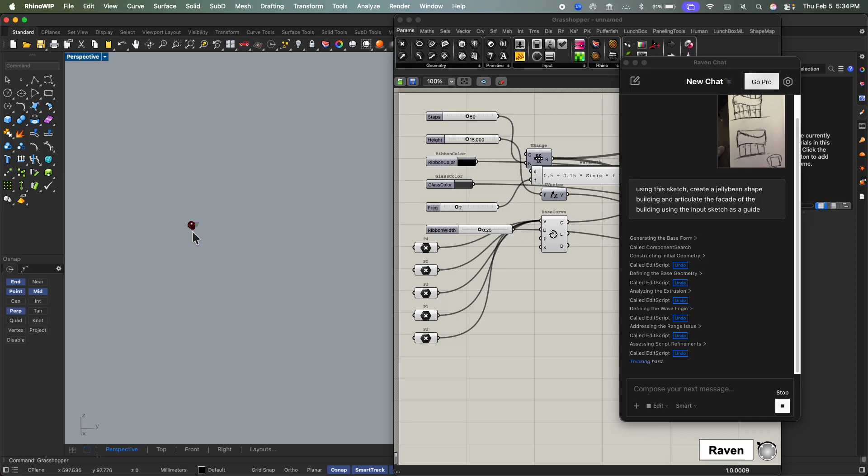Yeah, and this is the comedian, deadpan stuff. I think he's actually medicated.

Look at that. So let's change our central focus here and see what it comes up with. Sometimes you'll have issues with units, so in general you don't want to work in millimeters usually. This is like a tiny thing we're making, but let's see what it does.

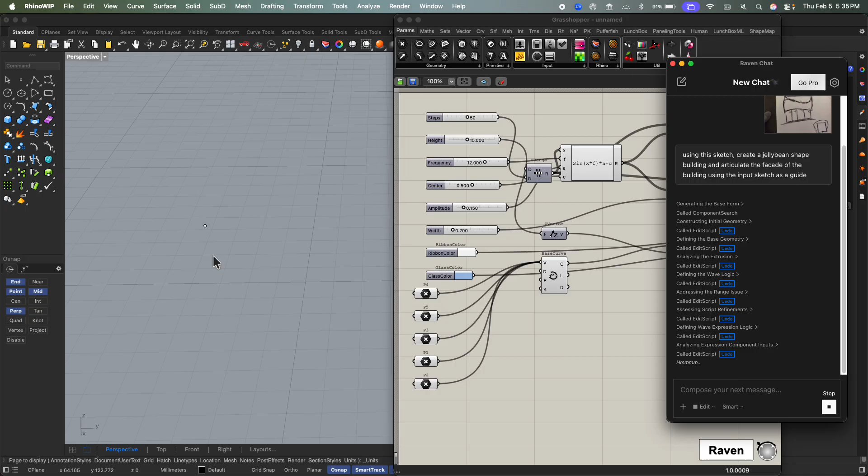Where's the jelly bean? There's our jelly bean. I should rotate it. It's still thinking through it, so it's going to break a few times before it gets it.

Will it do something if it decides it doesn't work, or automatically remove it? Usually that's it trying to figure out the data structure. So it's not really conscious, but it is thinking about the problem, right? In a way it's problem solving, and part of that problem solving is the math will break occasionally while it's figuring something out, and then it kind of goes through the process.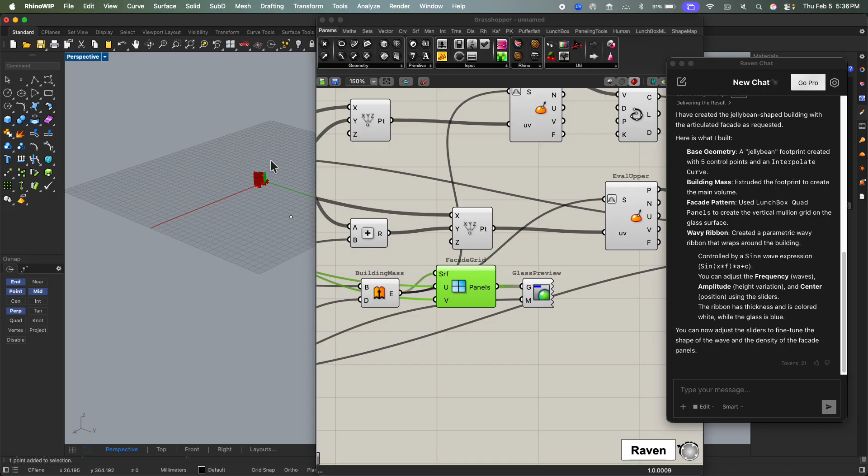So here we go, we have a surface, we have panels of a surface. Let's zoom in here and see what we got. Maybe I'll just put a box around this so we can zoom to it better.

Okay, there's something, now we're seeing all the grasshopper geometry. I'm going to take everything in the script other than the result, which should be a geometry preview tool. Let's just take the first maybe two-thirds of the script and hide it to see what it's actually doing with the result.

Whoa, that's pretty cool. So what do we have as inputs? What can we mess with? We can mess with frequency. So let's mess with frequency, that's fun. We can mess with the divisions of the panels.

It looks like it might not be panelizing it properly, probably something with my units that are off. We can mess with the height of the structure, and we can mess with the number of steps in the detail of the curvature. So I can take the curve way down in simplicity, or way up in complexity for a more refined curve, see a little kinetics there.

That's the research. It's also making for itself reference points, which is interesting. So it's naming them P4, 5, 3, 1, 2 - I don't know why I did that order. And there's some reference points of geometry that it's using to create this.

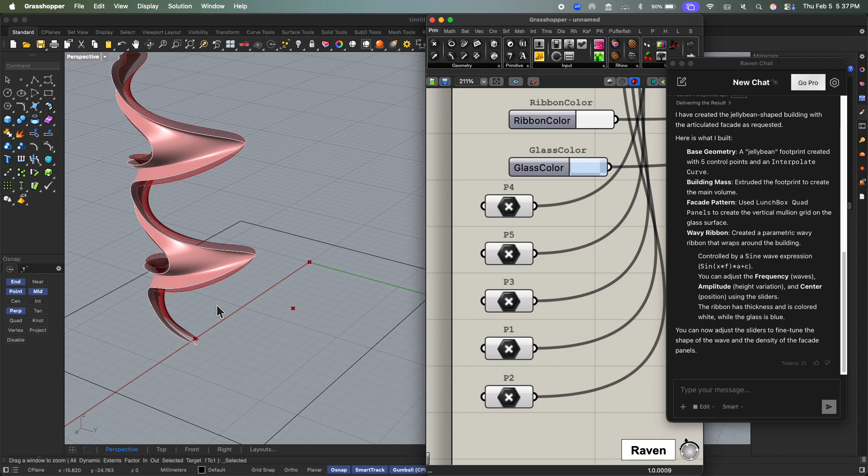Is it a jelly bean? I don't know. But now you can work through the logic and find out what's wrong and how to fix it. So you can go through - sometimes you'll get a component that, just for example, like array.

Let's do index. Now when the index isn't working, it's orange, and I can hover over this little flag and it'll tell me what the problem with that node is. Okay, so input parameter failed to collect data.

It's got no inputs. If I plug it into this one, that one's going to break too, because I put no inputs into nothing, right? So if both those components don't work, they're in orange. If something is actually broken in the math, they'll turn red, but orange is an indicator that there's a data problem.

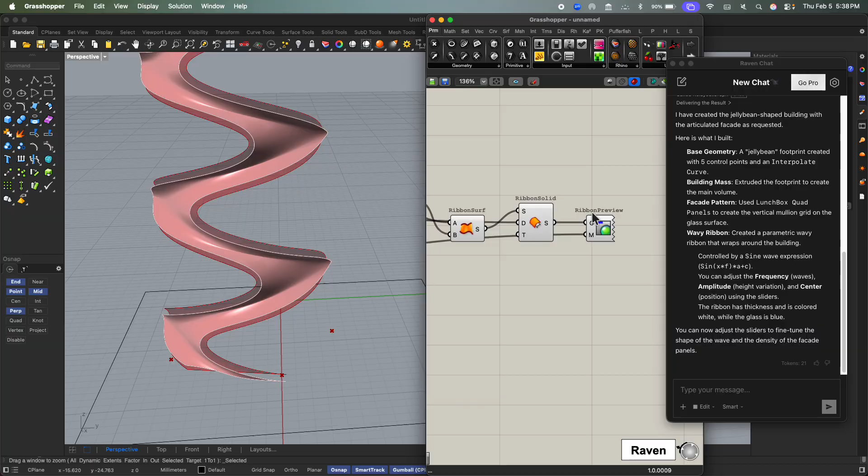So yeah, that's not exactly your sketch, but you can work with it, right? You have to go to the left a little bit. In the graph, the facade grid glass preview.

Let's turn that on. What is that? The facade it was trying to make. Yeah, see, it didn't really figure out how to panelize that. So what we could do is say, oh, interesting surface that you've made here. Let's try and panelize that surface.

Using a plugin called Lunchbox, which is another plugin for Grasshopper, let's make some quad panels. Actually, it's more interesting to do some skewed quad panels. We'll plug our surface into that and see if it can start to work it out.

Now the U and the V, okay, so a little bit of basics of the math of surfaces. Just like space has X, Y, Z, a mathematical surface has a U and a V, and that U and V are the X and Y of the surface. So if you pop off the surface, you're no longer on it, and you're using a W value, which is the Z of a surface.

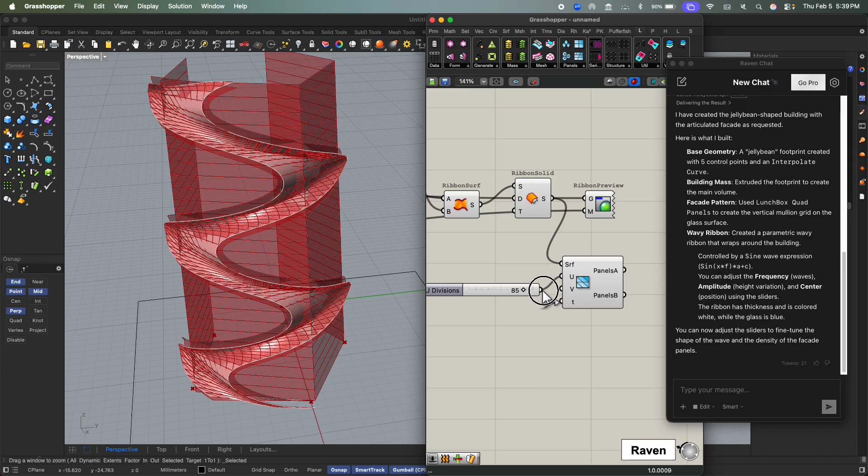Gets a little more complicated, right? But essentially what you're doing is setting the number of points that it's going to construct that panelization with. So if we enter a big number like 85 into our U and V as the coordinates of that surface, it'll be a fairly detailed panelization, right?

Now, if you zoom in on that, let's see. Let's zoom in. What's the panel size, you think? Can you zoom in on the panel? Well, this would be one panel right here. Right there. Yeah. Now, does that panel have any identity to it? It does.

Let's lower this so the computation isn't so intensive, and then we'll take these panels. The panels come out in A, which is the panel system, and panels B — I actually don't know the difference between panels A and panels B, to tell you the truth. Does it give you a dimension of the panel?

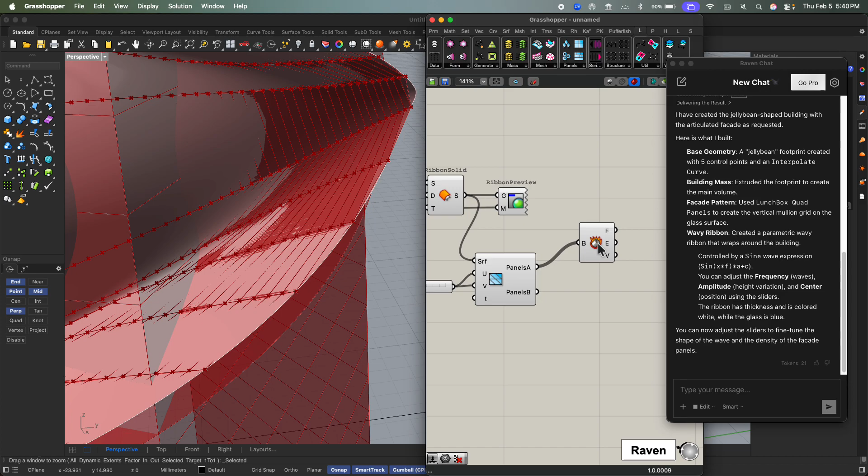Yeah, you can deconstruct. This is important because if you're actually making technical drawings on a skin like this, you want each panel so you can actually build them. So if I use what's called deconstruct brep, let's make this a little more visible. Deconstruct brep means it'll take any closed object and break it into a number of faces, edges, and points. That's a useful component because it's telling you how this thing breaks down. The output is faces as a list, edges as a list, and vertices or points as a list.

See, what I'd like to see, and maybe it has it there, but each panel gets numbered and gives me a size for each panel. You could do that. So let's take an area component. Area will give me the centroid of an object, as well as the volume or surface area of it.

So let's plug the faces into the geometry. You'll see a point appear for the center of each of the panels. Really cool. Yeah. And then at the centroid, you could use text. Centroid — did I do that right? No, it's preview text. What is it? Text entity, I think it is. Is it there? It's been a while since I've done a labeling operation.

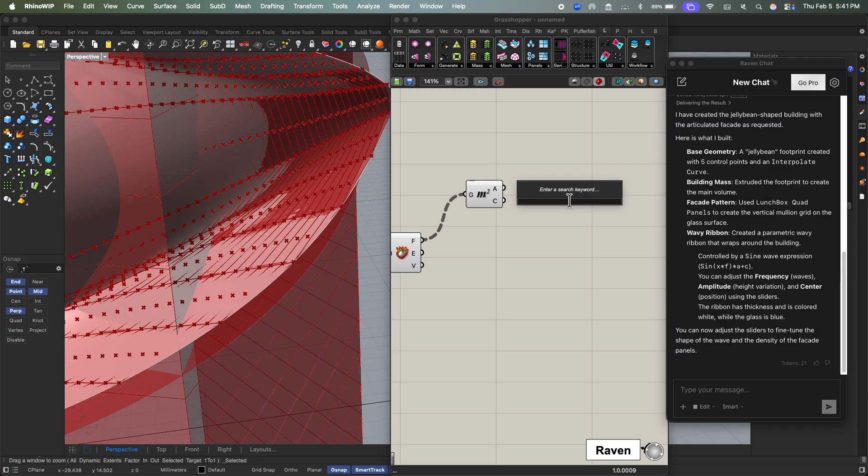There's a few different text tools. A label? No, it's text. Text on surface. So we'll take a panel. We'll write architecture. We'll plug that in as our text. The font we can set by right-clicking this and setting a font.

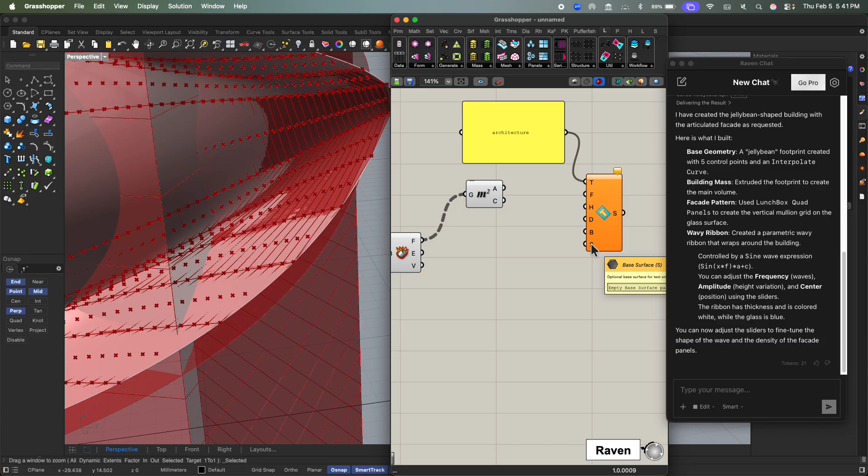This will be the height of the text. This will be the depth. This will be the baseline. And this will be the optional base surface for orientation. So I could use the base surface, or I could use the baseline for text, which is probably the centroid, I would imagine. Nope, didn't work. What's going on? Data conversion failed from point to curve.

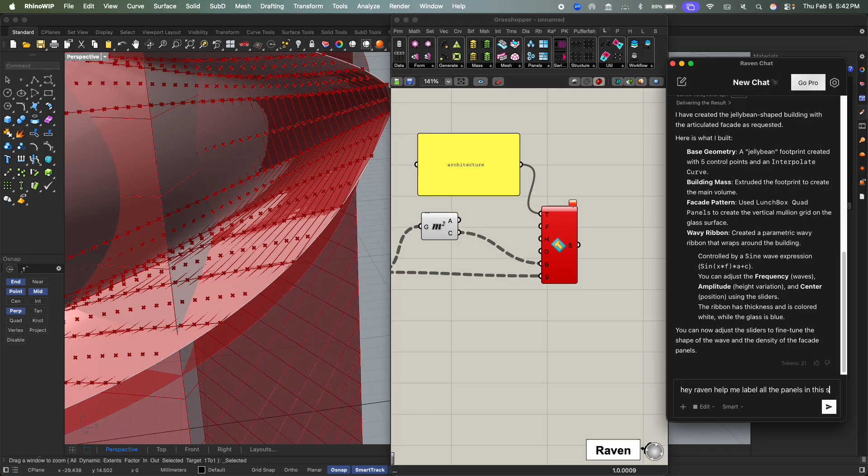So let's ask Raven. Hey Raven, help me label all the panels in this script in sequential order. So if I get stuck, I don't get frustrated — I ask somebody, right? The tool's there to help you work through when you get stuck.

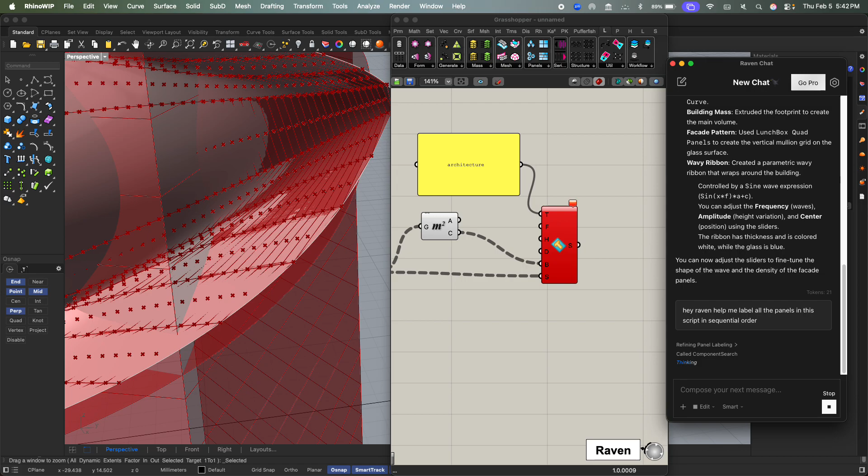Now there's every single panel. Looks like it's looking at the other panels earlier in the script. It's got those other ones, so. It does.

It starts to get a little complex, right? Sometimes. But what text is it using here? Here, tag. Oh, it's using tag. So we'll just take this component. The text is the number of the panel.

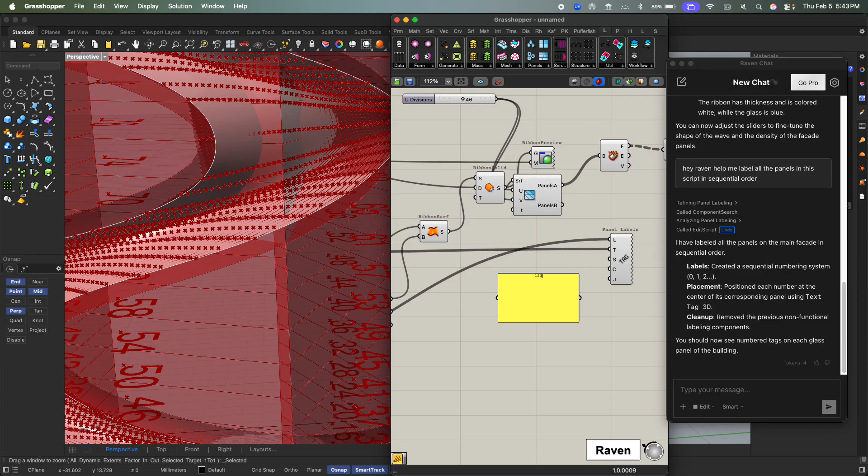Let's just say we want all the panels to read with the same text, which is just like 1, 2, 3, 4. That'll be our text. And our list will be the text to display, list. Oh, location, I'm sorry, that's the centroid.

It's going to think real hard. It might even crash because of the number of panels. Whenever you see the spinning wheel, you know something is amiss. You can hit escape and it'll stop that operation.

There's also a plugin called Watchdog. So you guys know how to use Grasshopper? No. Define use, experiment with. So the component Watchdog will, if that operation starts taking too long, you can set a time limit and it'll stop the operation, which is nice so your computer doesn't crash when the other one crashes. Yeah, so that one's called Watchdog.

It's pretty handy. A couple websites you should know about if you want to take it down in your notes is Food4Rhino. Food4Rhino is a good site. Tons of plugins, tons of amazing features, amazing things, endless math. And you can experiment with any number of plugins within Grasshopper on that site.

It's very useful. By the way, have you installed the Ladybug tools already, and Grasshopper, Ladybug tools maybe? No? Yeah, please do so. You can find the instructions.

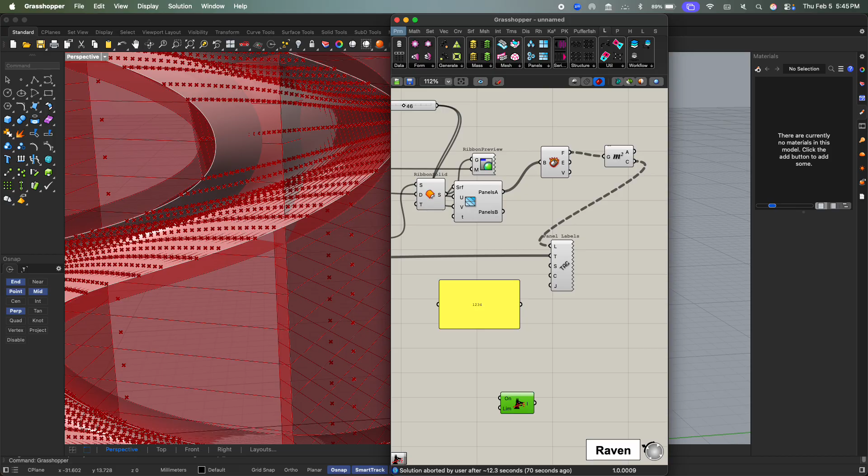How compatible is Raven, because we need it for plugins like Grasshopper? Oh, that's a good point. Would it recognize it, or would you just use that? Yeah, okay, you can actually point to certain plugins. So we had a question about can Raven recognize the different plugins within Grasshopper, which is an excellent question.

Try to generate the wind roses. Generate what? Wind roses. Windows? Wind roses. Oh, yeah, yeah, yeah, so that is using Ladybug.

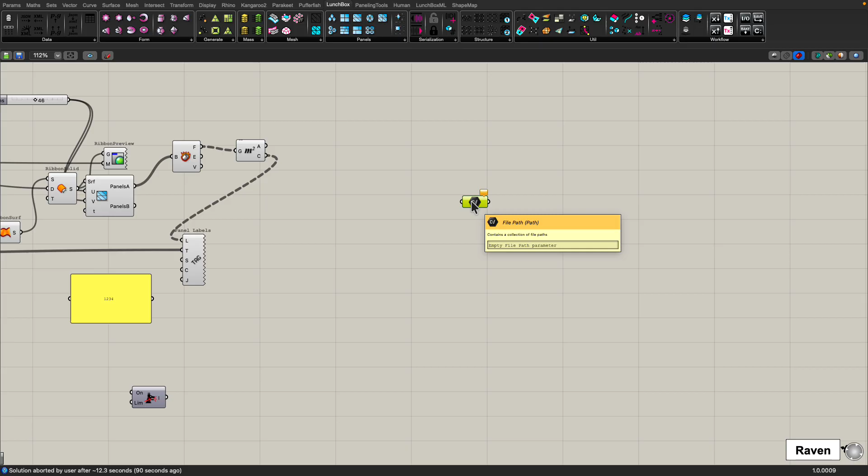Let's try. So within Grasshopper, I can set it to point to a file on my computer. Jason and I were messing around earlier with Raven, and we downloaded a weather data file. So if I right-click on the file path node, it's just looking for a file on my computer.

I'm going to say select one existing file. I'm going to go into my, let's see, Raven. Where did I put it? No, it's in here, documents. Raven Phoenix. So here I have an EPW file. Remember, an EPW file is the weather data file for a certain location.

Usually they're at airports. So now let's try deleting all this and trying an analysis on something. Let's just do Raven using a Ladybug interface or plugin to create wind roses using the provided node of weather data.

Now within Raven, I can open up this little dialog here and say, hey, I want to do this, this will just come with standard. I have kind of a research version of this software right now, but you will see, whichever plugin you have in Grasshopper, you can tell it to use that plugin. So I'm going to go to, where's Ladybug here? Oh, I don't have Ladybug in this version.

This is the work in progress one. Okay, I'm sorry, fine, but we could do that. You could tell it specifically use components from Ladybug, and it'll generate that wind rose as well. You can also do it for any kind of data stream, like a psychrometric chart, heat, anything that comes with that packet of weather data.